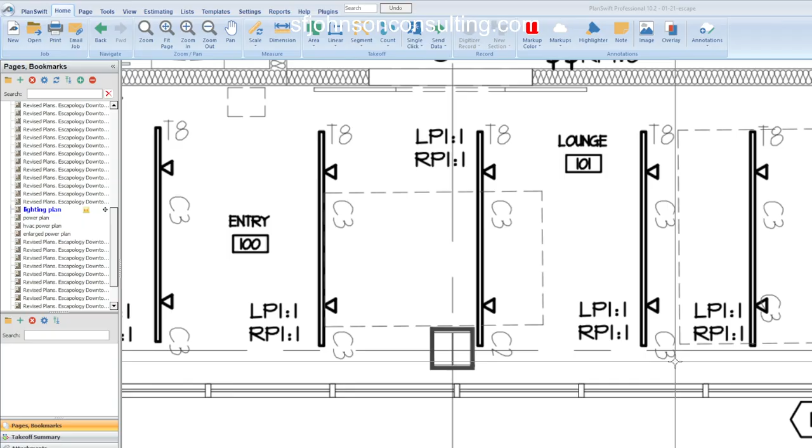But when it comes to electrical, you have a lot of challenges. The conduit, the wire, how do you determine what these different things are—if you're an electrician, you should know what this means. But you may not be an electrician that has time to do this. So let me show you why you should either hire me to do your estimates, pretty simple, or let me teach you, which is even better.

As you know, with your electrical plan, you have your lighting plan, which we're looking at right now. We have to be able to determine—we can count, and if you have a good counting tool, as you've seen me count a million times, the counting is easy.

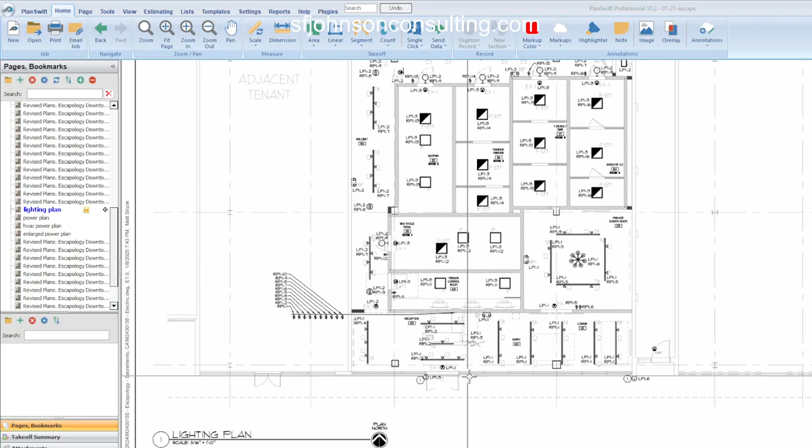I think this Escapology is probably like a massage therapy kind of place, I don't really know. But when it comes to a set of plans, a set of plans is a set of plans. All right, so lighting plan—we can count all day.

You'll see my study video if you choose, to see how I did the lights. This one, the emergency light is different than that one, and how we do it.

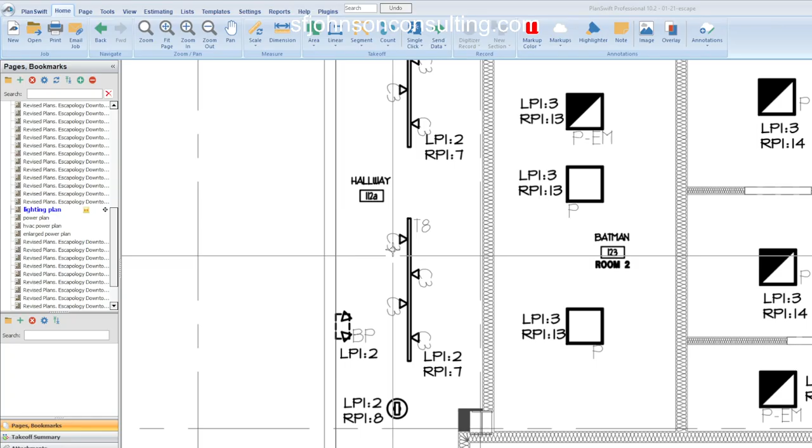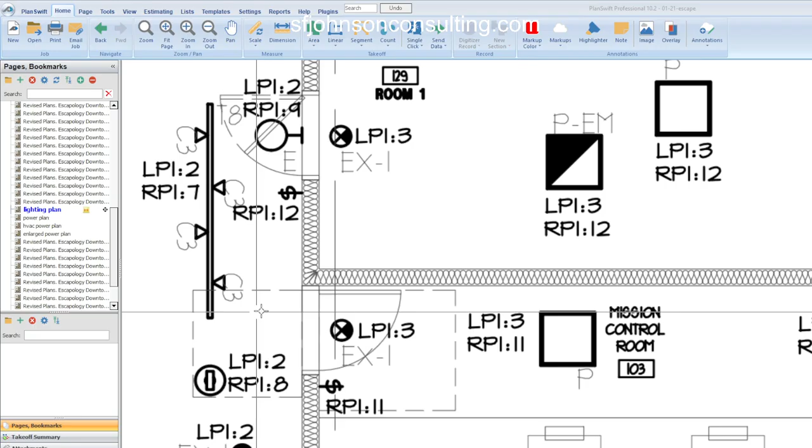If we have track lighting, what's the proper way to account for it in your takeoff? Well, it really depends on if it's standard. If you've got 10,000 different lengths of track lighting, which I don't think we do, it's harder. I think all of these are pretty much the same length because we have T8, T12, whatever. They're probably all 8 foot, maybe some a little shorter. No, it looks like they're all T8, which makes it easy because you want to do the takeoff based on how you have to buy the material.

But when it comes to placing the labor for setting the T8, it's separated from the labor to set our C2s and C3s into the track. So you want to make sure you separate all that stuff. And that's just the lighting plan. This one's a little complicated.

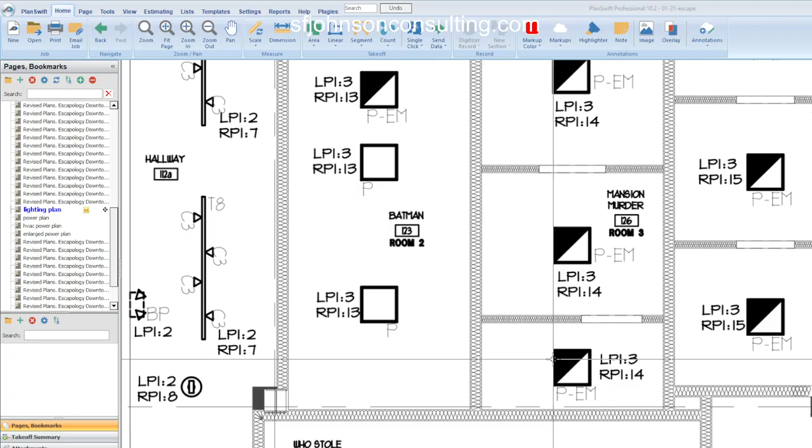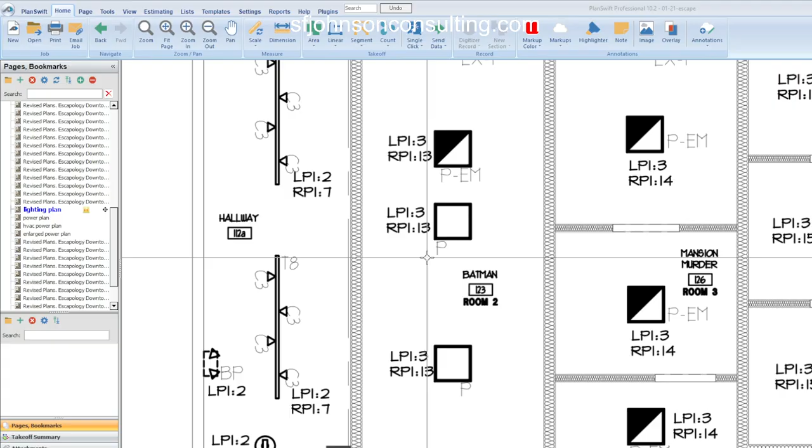Now, in terms of our conduit and wire, we have to understand how lighting circuitry works. Basically they're telling us how the lights are connected based on the subscripts that they have on it. When you take my class, you'll understand how I run the stuff. It's pretty close enough, add 10% like most things, and you're close enough.

How you run it, do I run it horizontally or vertically? Well, it really depends on a few things, how it's noted here. And in terms of lighting, a lot of the same lights, even in different rooms, are controlled by the same lighting control.

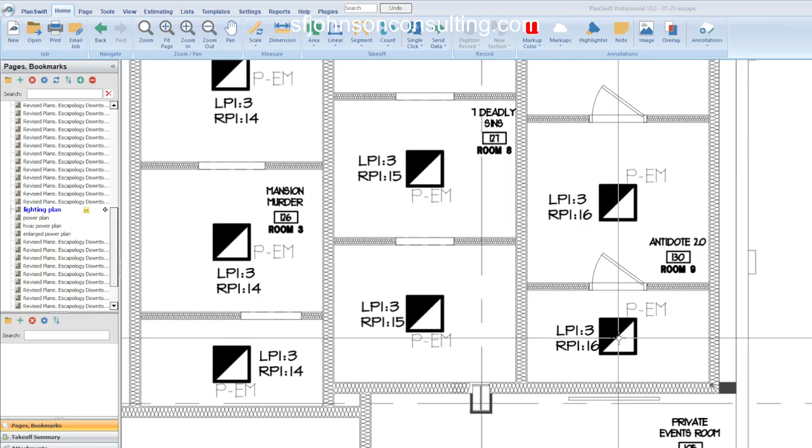And that's the most difficult part when we talk about electrical estimating: you want to give it a sufficient amount that if you were the estimator and the electrician, hopefully you have a good relationship, and say, hey, this is how I ran it. That's why I always give my clients videos. This is how I ran the conduit, and as far as the wire configuration, it's in the specs or in the plans, or it's standard MC cable for certain parts and number 12s for the home runs.

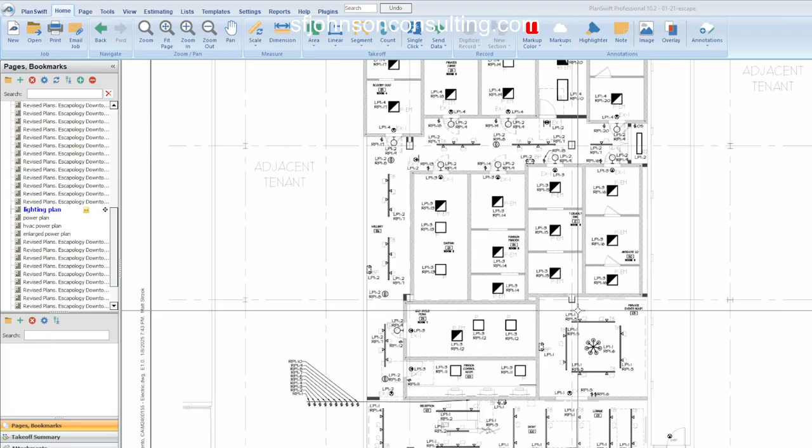Typically the case. That's not hard, but that's what you have to think about, and that's a lot to think about. Framing, it takes you 5 minutes to figure out linear feet of wall A, B, and C—2 seconds once you get real good. But this, no, because every set of plans is going to be different, and the way lighting controls are set up is going to be different.

What does this mean? I have to match it up too. But what we have to do is physically run that wire. How would we physically do it? What you want to do is give the best representation, the cleanest runs. You don't want to go all in circles and stuff—you want the cleanest runs you could possibly have that are real life.

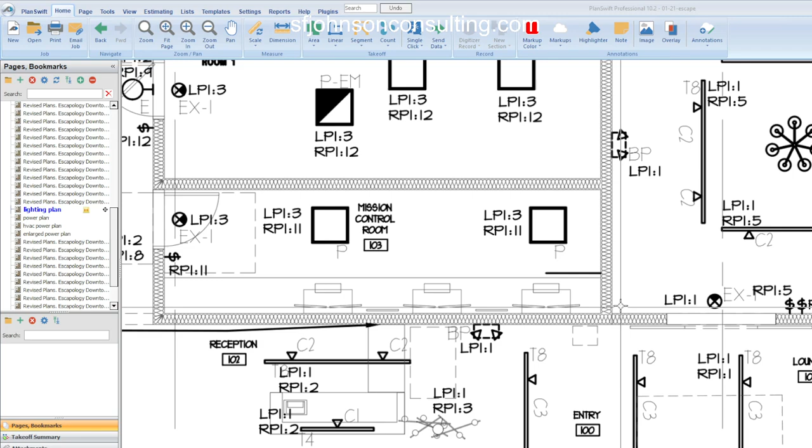If you're really good, you're going to ask how far up this wall goes, do I have to penetrate the wall to get through here if necessary. My son's an electrical tech, and he says sometimes we got to put a hole in the drywall because we think it's free and clear, but it's like a cross. I said, bridging? He's like, yeah, something going horizontal, not just the vertical studs. And then you end up running into something you have to cut through to get the wire through the wall.

That's why I like working with people that do it, because you get a practical understanding of what happens every day. Then, as the very detailed, anal estimator, you can speak with your professional and say, this is how I did it. Now with video, you can show them, so you can really be competitive. There are people out there using the right tools, doing the work as clean as they can, and then going in there and winning.

When you win a project, it's not set in stone—you need to make sure you understand. If you take my construction law class, contracts and understanding them is very important. There's so much that if you don't have some kind of mentorship, or don't do it for a couple of good years for somebody who does it well before going out on your own, you're going to be taken advantage of on so many levels, or so lost on how to do certain things.

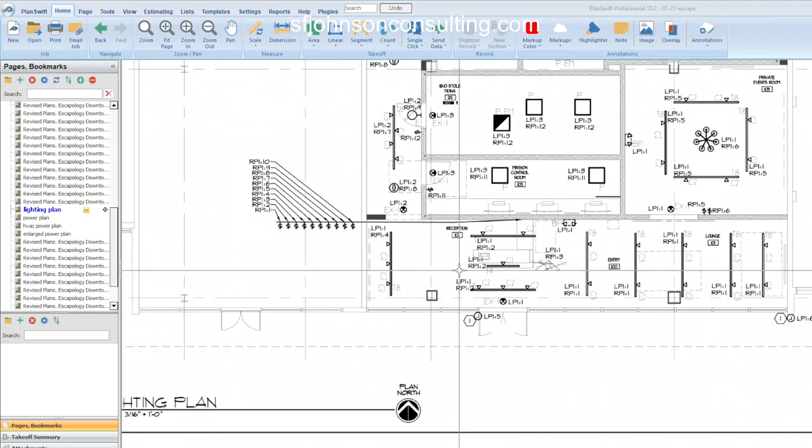I don't mind sharing my logic and understanding of everything. A lot of people in construction are too competitive to think too far ahead. That's why I don't have the subscribers I should—if I was some other person, I'd have 10 million subscribers. But for some reason in this country, we think if I help you, I'm not helping myself. That's the most ignorant concept we've held onto.

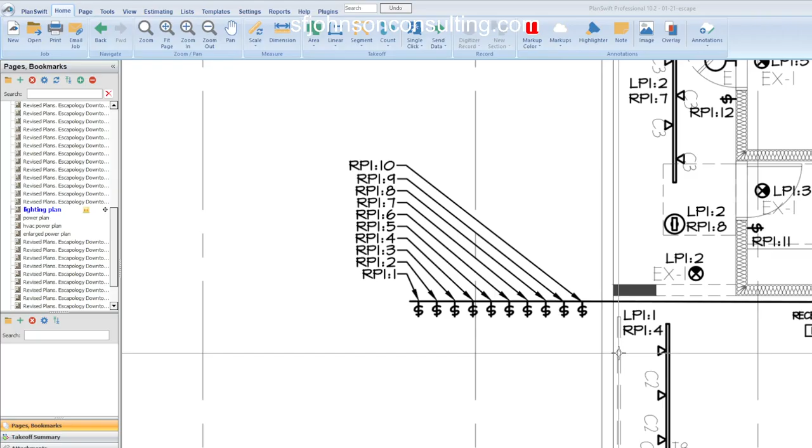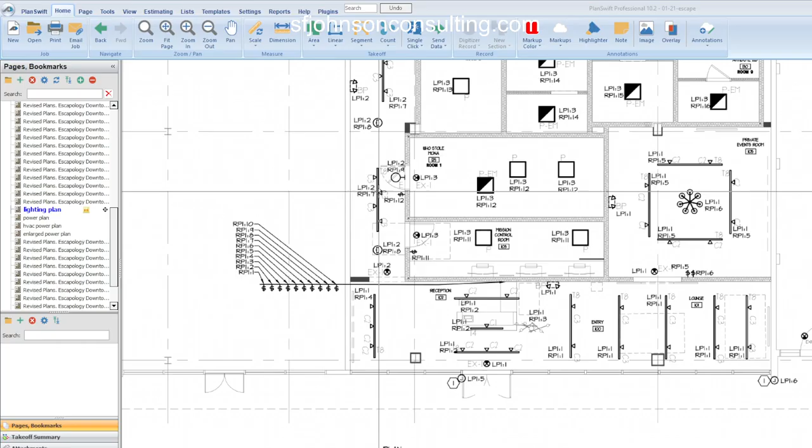We'll keep moving. So what you want to do is make sure you do a lot of projects, and the hardest part is being able to run the conduit. How do you physically get that going? It's easy—after a time, and you talk to a good professional, a good estimator or electrician you work with, you'll get it.

All right, so that's just the lighting plan. Now the power plan—depending on how detailed it is, you've got to do a lot of thinking on your own, and you have to read the specifications.

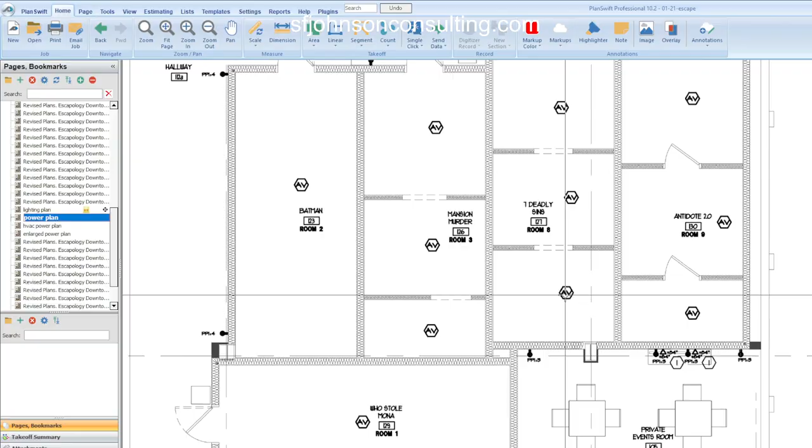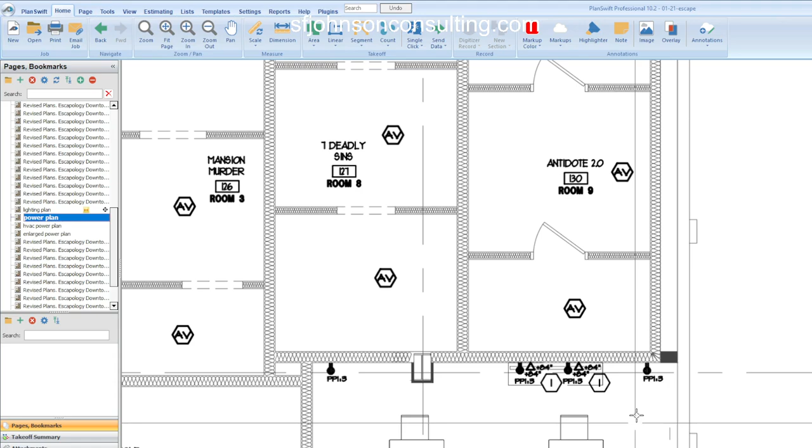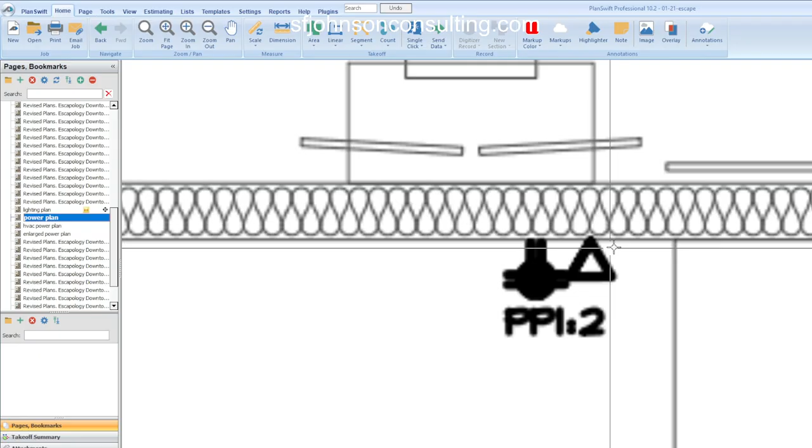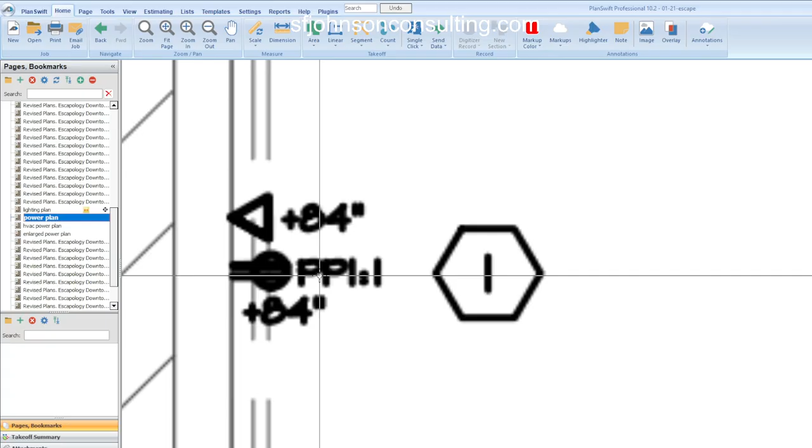And how do I take care of it? Because if I'm the high voltage electrician, I'm not providing Cat 5, Cat 6, low voltage wire, anything like that. But I have to provide the junction box and the conduit to the ceiling in most cases. But as far as running the power for the general purpose outlets—well, what is PP1? That tells me it's going, hopefully there's a panel called PP1, and position number 1.

Just like the lighting, depending on the subscripts and everything on there, those can be connected together, and at some point PP1, PP2, whatever—we'll show you in class how we run it to the panel. What's the best way to run it? What's the cleanest way? Because that's pretty much how a good electrician is going to run it.

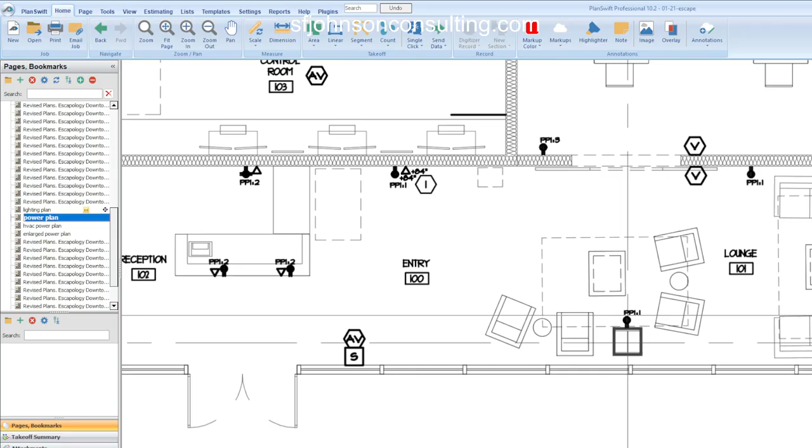And then your second step—what is it? Pricing it and determining man hours. Well, you need another tool for that, just like you have the tool to count and measure lines and stuff—you need another tool for that.

And let's never forget the HVAC power, and the disconnects—whether they're fused or non-fused—and the general purpose power that also connects. You've got to remember that.

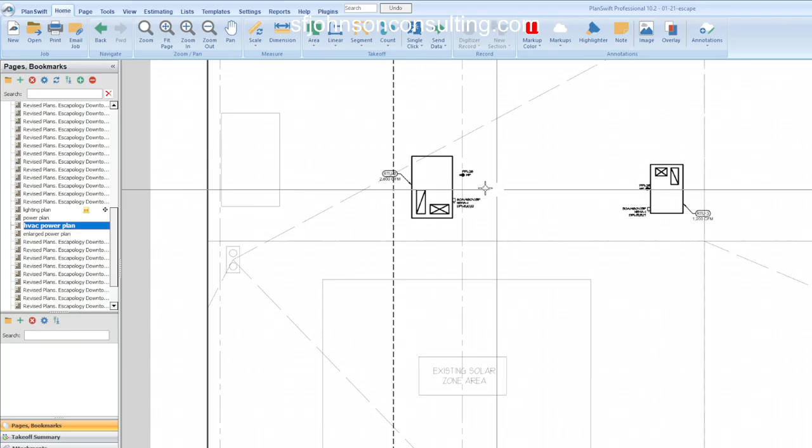Now I'm out here on top of the roof—where are the panels? You've got to make that a practice, know how to go back and forth. In most sets of plans, the only place you're going to find the position of your panels is on the power plan, because it's the power plan.

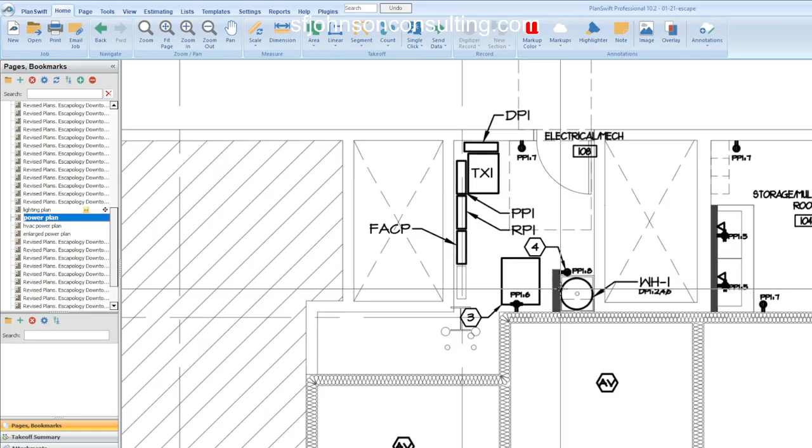For lighting, when you're running your home runs for your lights—let's see, I might be wrong, maybe they show you the panels on the lighting plan. No, they don't, right? Because that's just not what they do. But they show you on the power plan, so you have to know when you go back to the lighting plan and you're running your actual runs—they give you a little outline of them.

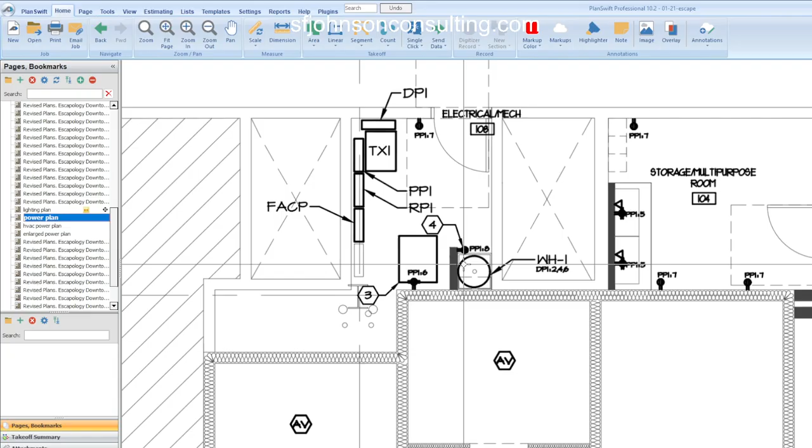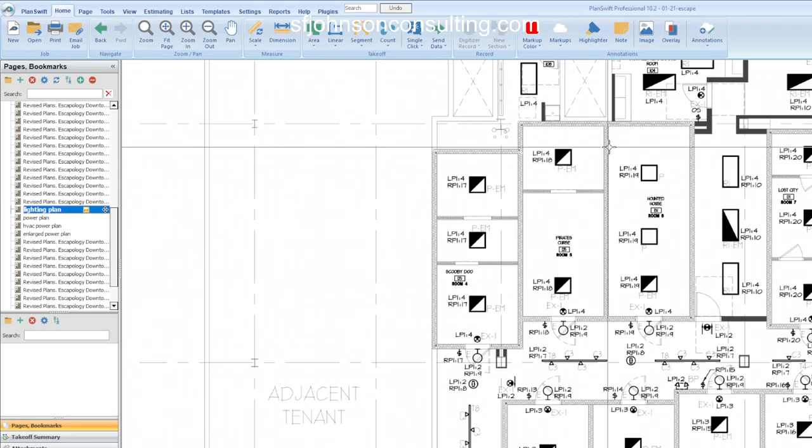But now, which one's P1, P2, which one's LP1, LP—you've got to go back to your power plan, and note it in your brain. Then when you're running your home runs for your lighting plan, you know it's about where LP1 is right here. So I run them all together, and I run whatever I've determined the home run to be.

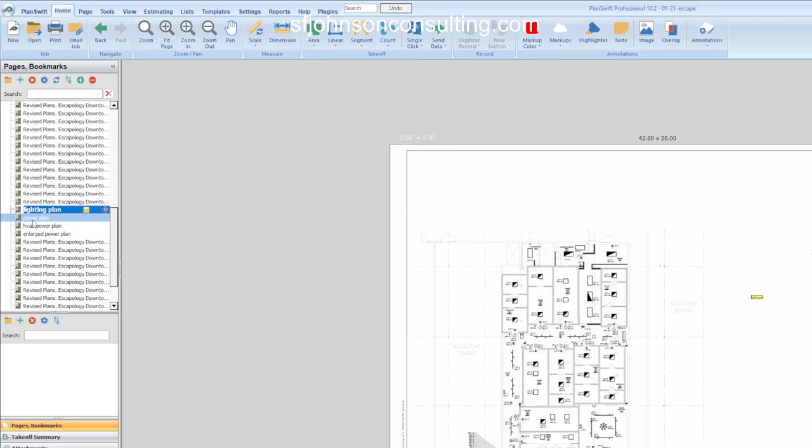For all of the LP1s, RP118s, we ran them all to this location. We ended it here, and now we're going to run the home runs from here to there—that's how that works. At the end of it, you can't see lights or anything because all you see is all of your runs. Where this is easier, much easier—not a lot of outlets, which is beautiful.

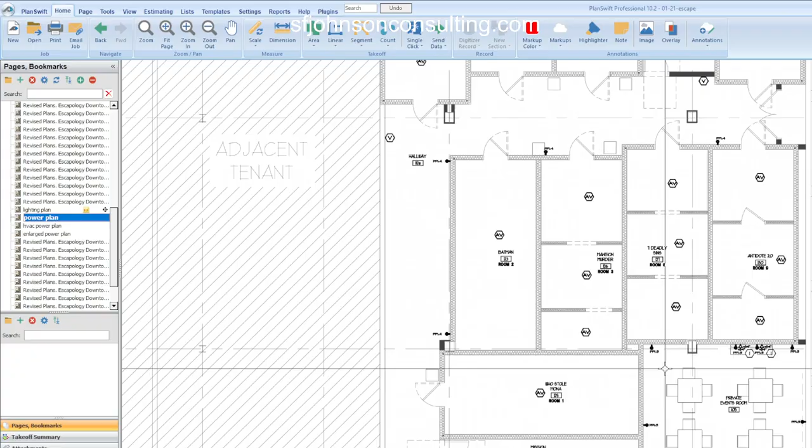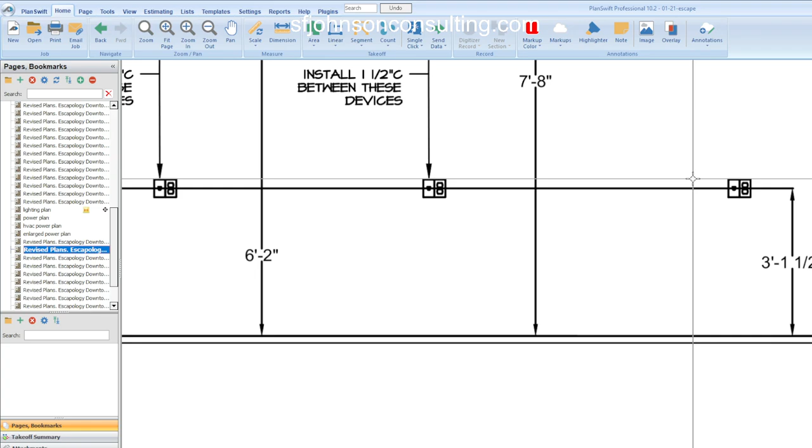We're talking about California regulations. Well, it's probably standard that any device is standard 3.5 feet above finished floor, and so what they did is give us enlarged plans, but we don't really need that. I mean, this is for the actual electrician when he has to go and do the work. Well, now I can do my actual measurements and determine exactly where everything has to go.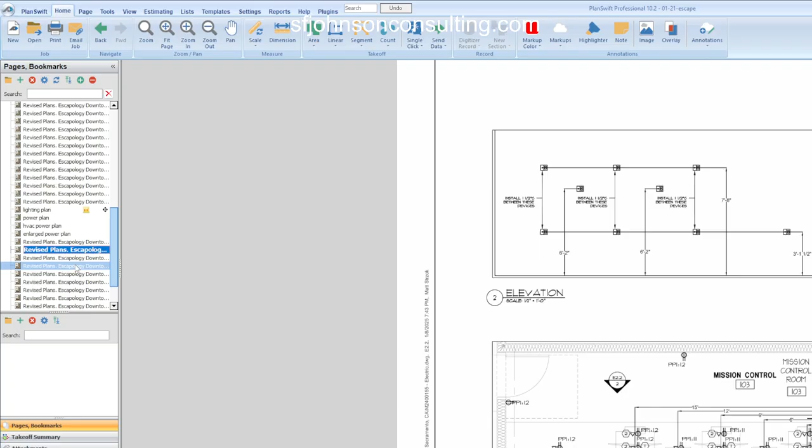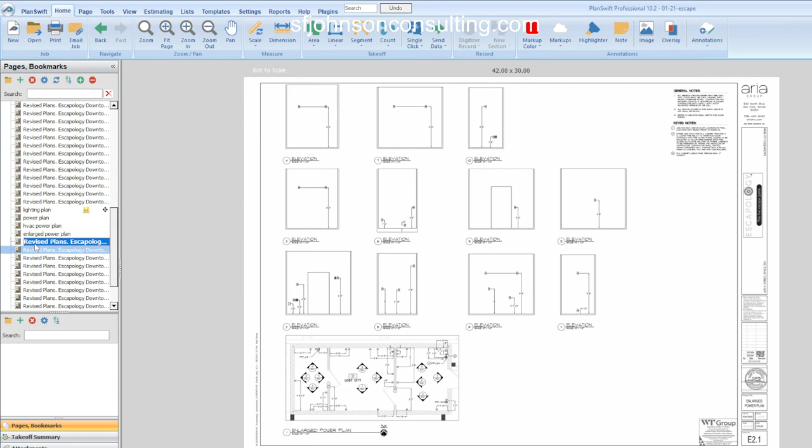And this is what it looks like on the plan. But in the elevation view, in the real life view, that's what it looks like. All right, and I didn't mark... okay, so HVAC plan, all the enlarged plans. Where did I? That's plumbing. Okay, well, you just have to go with me on this journey, because the last thing we always have to do is, let me make it easy for my mouse hand. We have to look for and find good elevations for, there we go. Oh, I did put it on there. And we have to find all of, okay.

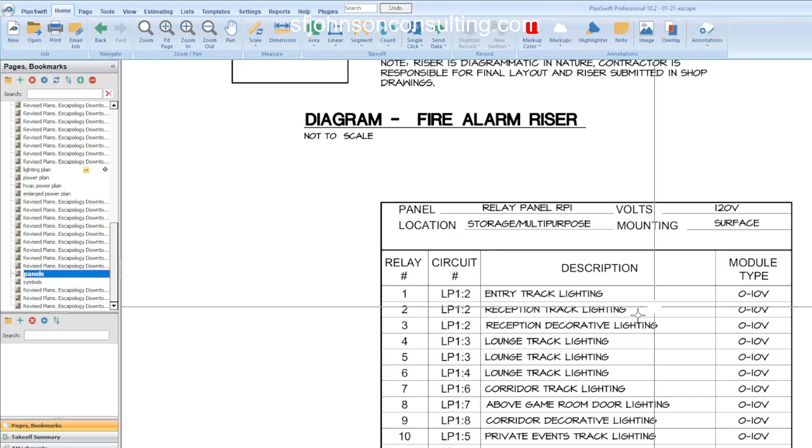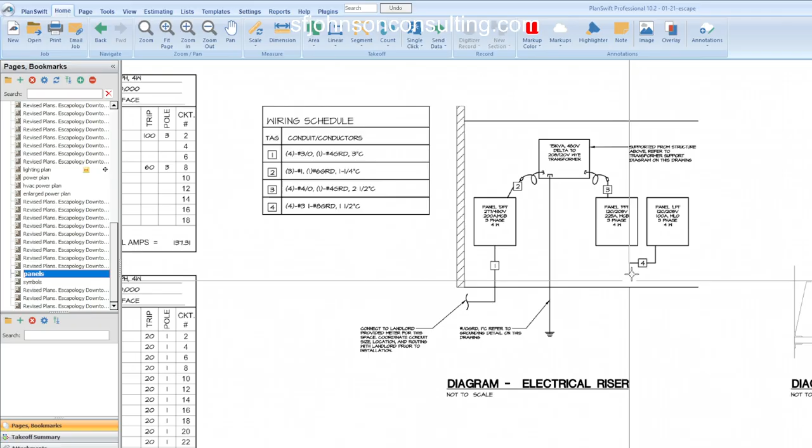So this tells you your circuitry for the lighting control. That's nice and clean. It's a nice set of plans. All right, so we need our single line, right? So we can determine all of the power feeders. And when we looked on that power plan, these are very close to each other, so it shouldn't be a problem at all. And so the 2, 3, 4, and 1 should be telling us the wire configuration for each of those.

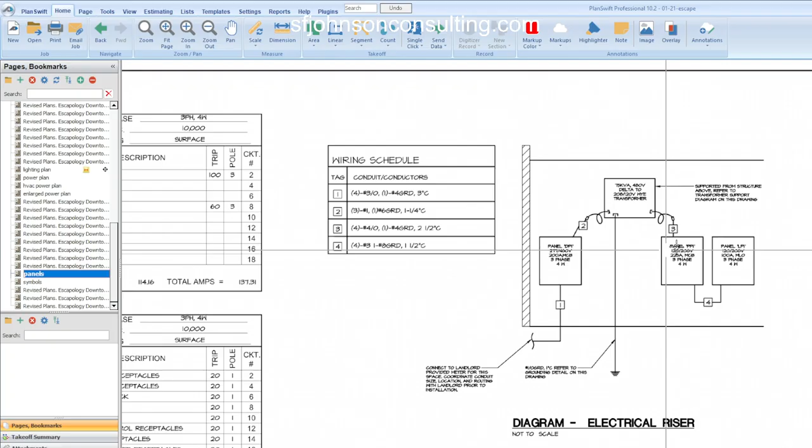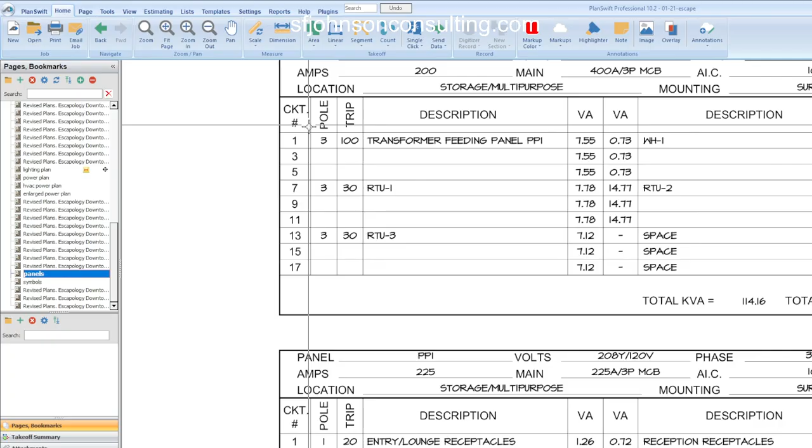And whether I'm asked to or not, I just use rigid steel for all of the power components. EMT to it, or PVC depending on where it's at. But the last step is we got to count our breakers, right? The size and how many poles on both sides. Okay, and we have to be able to determine, based on the number of breakers, our cost book is going to tell us how many man hours we should apply.

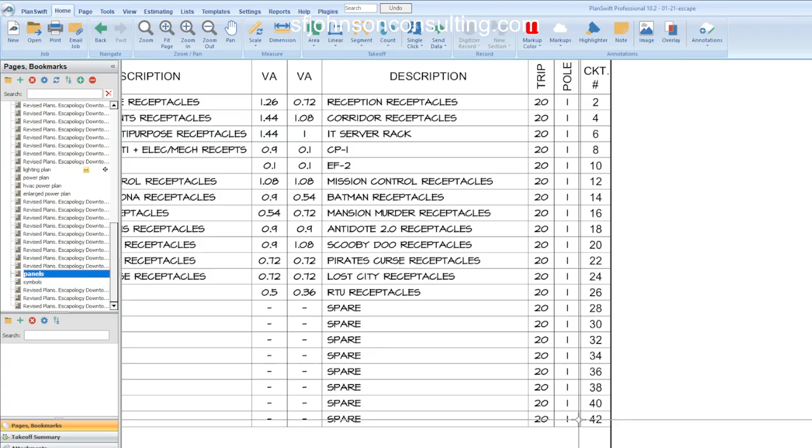42. Now, it doesn't take me that long. Okay, because the better you get at a thing, it shouldn't take you that long, right? But we are saying that this is what the construction industry standard is giving you. And if it takes you less time, what do you do? You knock those man hours off and you become even more competitive.

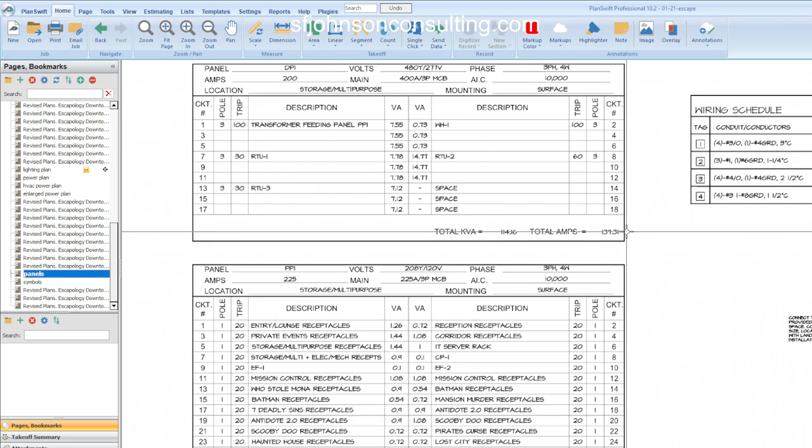Okay, and so typically a 42, that's about 15.1 man hours they give you to install a 42 breaker panel. Anything above and below that, I forget, because that's the typical 42 position. And so, yeah, we got to count all the breakers too. So that's like the last thing. But as you can see, the easiest part is just having a really good counting tool. But now you have to make sure you have a good and logical way of determining how many linear feet of your feeders, your MC cable, your number 12, number 8, whatever it is.

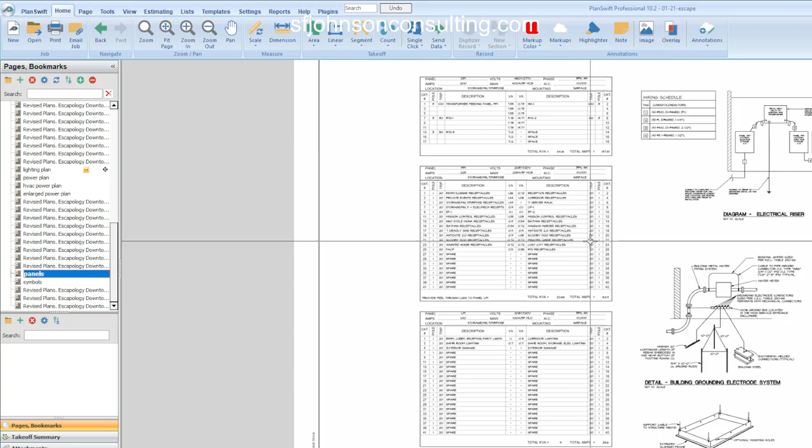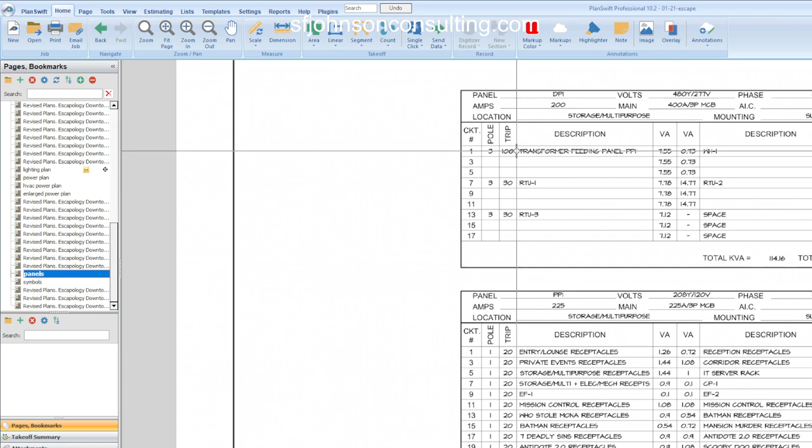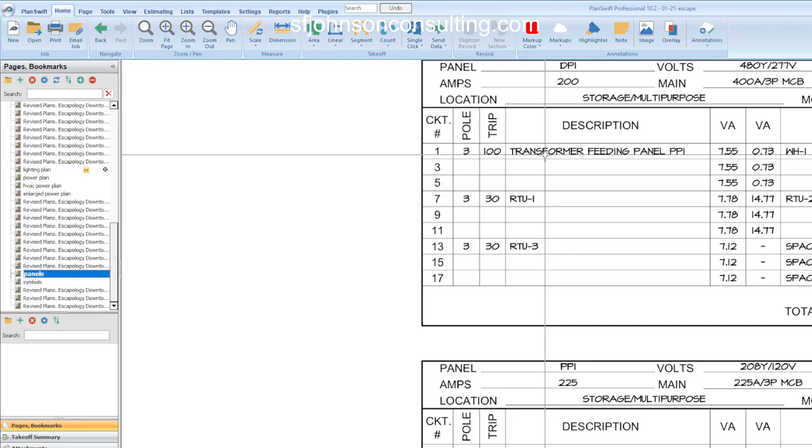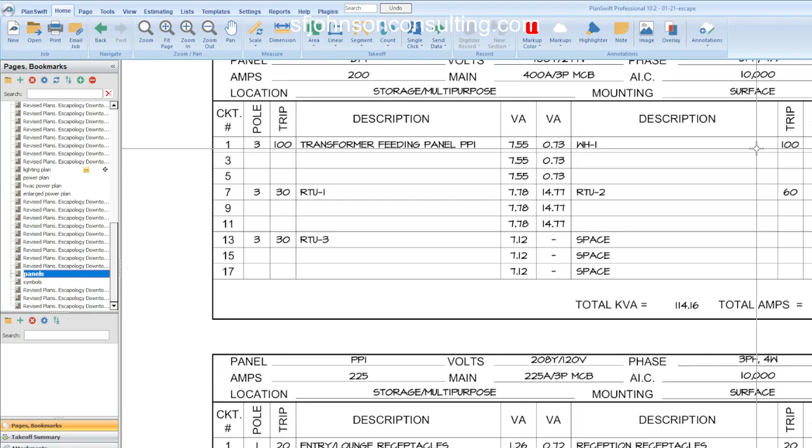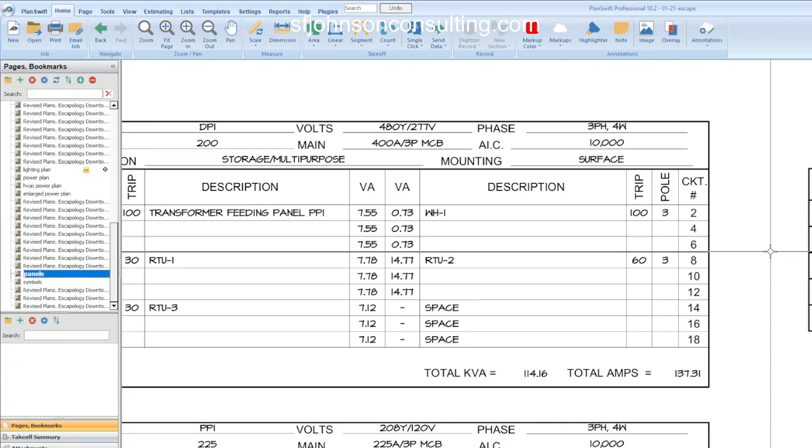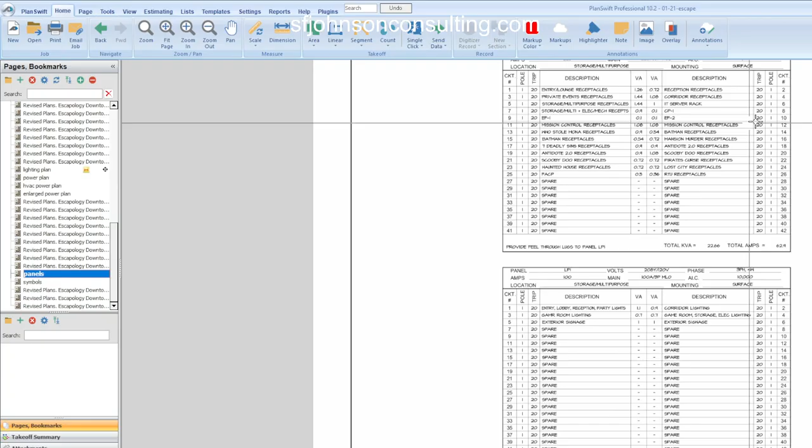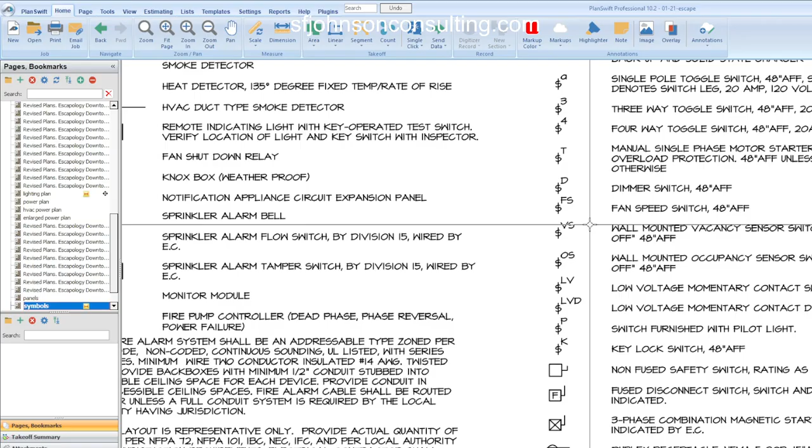Ask somebody. All right, and I think that's it. Know your symbols, okay, and usually in the estimate. So, 3-step process. 1, counting is easy, okay? What's not so easy are the wire and conduit runs and how to think about your labor costs, okay? That's not so easy. So you need to do it for the lighting plan, for the power plan, break out

any HVAC, okay, power. And 2, if you have a restaurant, which I'm doing a Dutch Bros, which is a crazy restaurant, your outlets are going to be all over the place, okay? NEMA 5-20R, NEMA 5-15, NEMA. So the first thing you want to do when you have restaurants of any kind is go in the power plan and start to break that down, because it's always some crazy configuration on how you have to count your outlets. Always, any restaurant.

And that's the Dutch Bros, not even a restaurant. It sells stuff you put in your body, but imagine how a Marie Callender's, they don't have them anymore. Texas Roadhouse. I love Texas Roadhouse. I got to go at least once. And this show should be sponsored by Texas Roadhouse, where you can pick your steak. Oh my God. And it's just always so good. I don't know about those people.

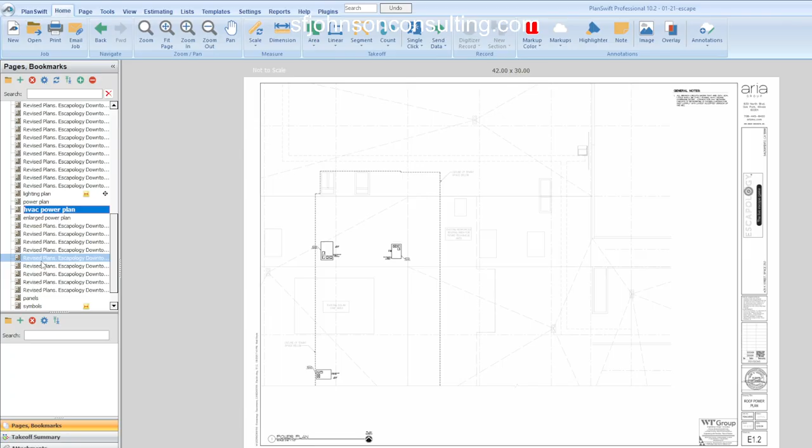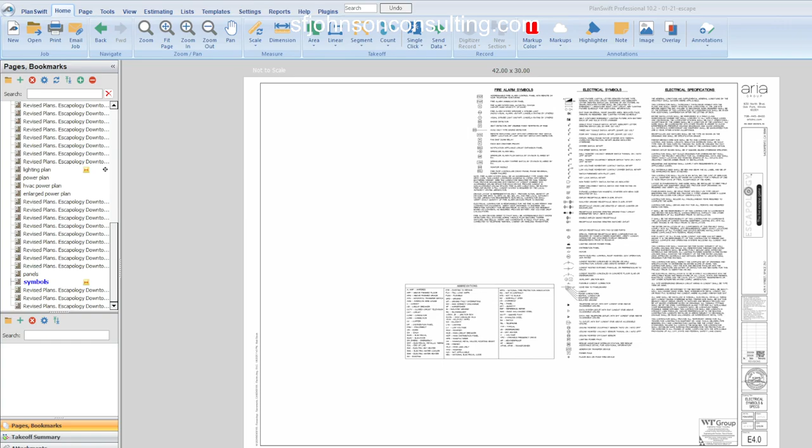All right. So anyway, and the pièce de résistance. That's French right there. Let's get it over here. The specialized Excel spreadsheet. Okay. That will have some stuff filled in for you. And if you take any of my estimating classes now, I went from 10 weeks to a year, okay, to forever, as long as I'm alive, and you still need to learn.

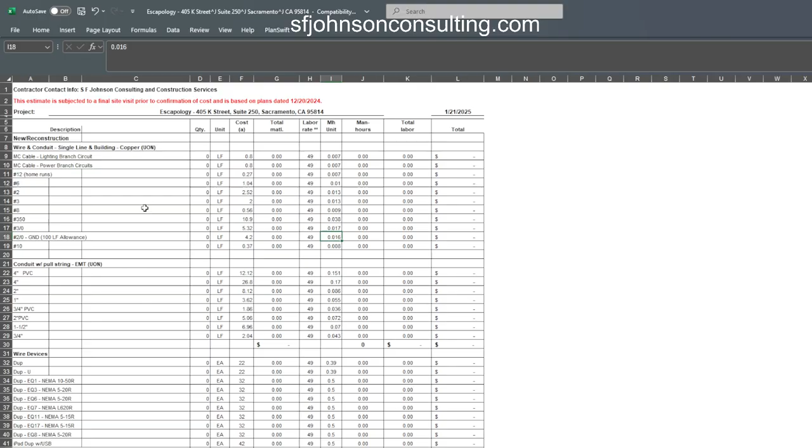Because my clients are self-performers and they miss more classes if we were strict about it than they attend. So I make them videos, got requirements. Hey, our numbers have to match. If our numbers aren't matching, we have problems. And so when you take a class with me over that period of time, however long it takes you to feel comfortable to branch out on your own, you receive this stuff from me. I'll teach you how to do this, and I'll give you man-hour calculators that are just the wire, that are just the conduit of all kind.

And the wiring devices are kind of crazy. So, in the process of doing so many for electrical, because as you know, if you're an electrician, all of your wiring devices are insane. There's so many kinds. So we want to break that into like a book of stuff for wiring devices. And then lighting and panels and switches, not as bad. Okay, but when I teach you, you get this. And I show you how to edit it. And I give it to you if you mess it up. And we go over what overhead and profit should actually be.

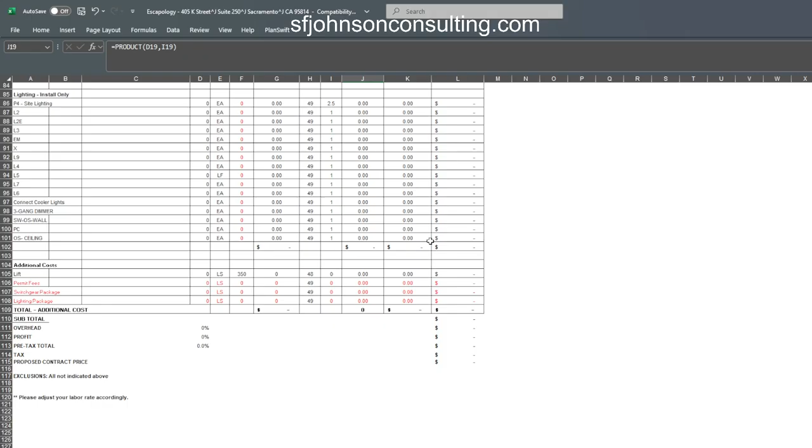And clue, today's overhead and profit is based on last year's direct operating costs. Okay, so it's almost tax season. I've started myself. You should be determining or know really good right now what last year's operating costs are, because those are adjusted every year. I've been in business 16 years, and some of the years, the amount of money I made blew my mind. And some of the years, I'm like, how did I even survive? So, yeah, those things change over years, and you have to change with it.

And one thing I've also noticed is that contractors are horrible with keeping track of any kind of cost. And so if that is you, make sure you reach out, because I am too, but we got to fix our problems in 2025. And it's important. It's like you don't want to make so much money that you don't care if you're losing it, and you don't even know it because you don't pay attention.

And I think that's a very bad universal principle to have, to not pay attention to how much money you're making. Don't pay so much attention to it to where you're an a-hole, but you need to be aware of how much money you're making every week, every month, and how much you're paying out and to who. Okay, because some of your assistants are ripping you off and then blaming somebody else. Okay, so please pay attention. All right. What else? I don't know.